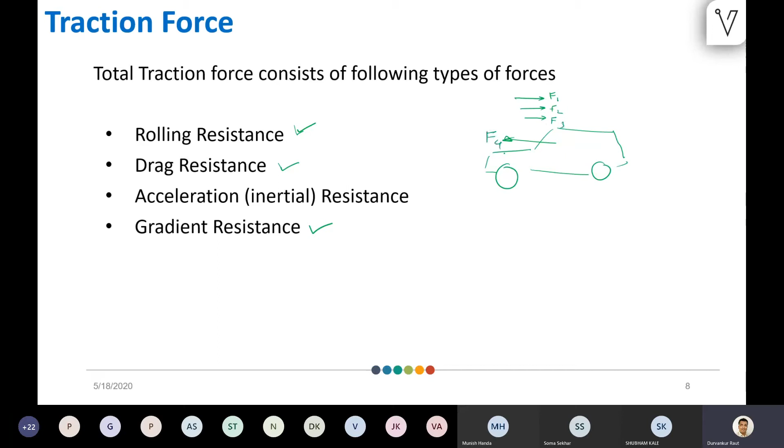So there are three different resistances: rolling resistance because of the rolling friction, drag resistance, and gradient resistance. So I have a vehicle, and this vehicle is being driven towards left. There are three different resistances which are against the motion. Let's say I have values of these resistances as F1, F2, and F3. And if the force applied by the wheels is F4, if this F4 is more than F1, F2, and F3 together, then only the vehicle will move.

If this force is less than all these forces together, then the vehicle cannot move, right? Even if it is equal, the vehicle cannot move, because all of the force applied by the wheel is getting cancelled out against rolling resistance, drag resistance, or gradient resistance. It cannot change its state of rest or state of motion, right?

If it is already in motion, then if F4 is less than F1, F2, F3 together, velocity will reduce. If F4 is equal to F1 plus F2 plus F3, then velocity will remain constant, because there is no extra force available to push this vehicle. This extra force which is available to push this vehicle is called acceleration resistance, because that also needs to be overcome from an inertial perspective. In the inertial frame of reference this can also be called a resistance, or you can call it acceleration force.

So this acceleration force, which is supplied by the wheel, let's call it Fa, because Fa is different from F4 in this case. F4 will be the total force which is supplied by the wheel, or shall I call it by some other name? Let's call it total traction, FT.

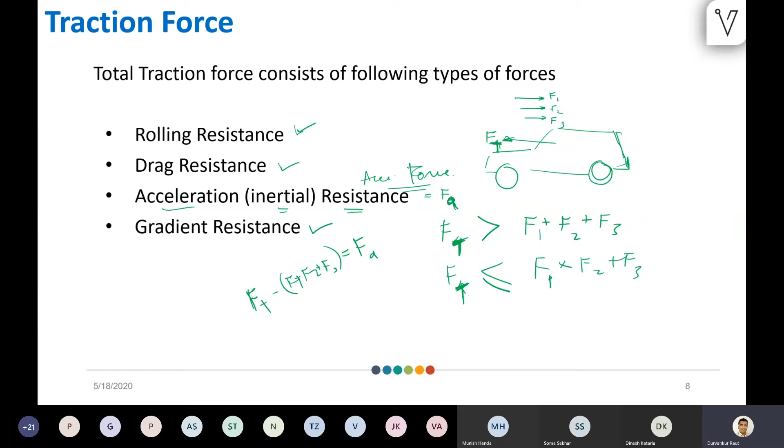So if the total traction force supplied by the wheel is more than F1, F2, F3 put together, then the remaining part, which is FT minus F1, F2, F3 put together, will be used for accelerating the vehicle. If this is not overcome, the vehicle will decelerate, it will reduce velocity. Okay, I hope you have understood. If not, we can discuss this again at the end of the session. So let's move ahead.

Let's talk about the first resistance, rolling resistance, composed primarily of tire deformation, tire penetration, surface compression, tire slippage, and air circulation around the wheel, and many other factors known and unknown till now. All those put together are expressed by one simple term called the rolling coefficient of friction, mu r. If it is known, then the rolling resistance force is calculated as mu r mg. If the vehicle is rolling towards right, the rolling resistance will be towards left, opposing the direction of movement.

Resistance from tire deformation means that while the vehicle's tire is on the road, the tire itself gets deformed when it is resting on the road. Although it is shown as a circular shape, you might see some flat portion in the tire, right? This flat portion is here when the tire position angle is, let's say, 0 degrees. As soon as it becomes 90 degrees, the vehicle moves ahead and now this portion comes into contact with the road.

And rolling resistance, as we talked about, is basically calculated from a simple formula, which is mu r mg. In this case, mu r becomes the rolling coefficient of friction. This mu r is dependent on the road material and the tire material. So for a steel wheel and steel rail, like in locomotives and railways, the rolling resistance is very less, 0.001 to 0.0025. For bicycle tires again it is less if the bicycle tire is well inflated.

If the tire is not inflated properly, or if the person sitting on the bicycle is pretty heavy, then there will be good enough tire deformation and this number will vary. But in total you can maybe assume it to be 0.0015 to 0.0025, again based on the road surface condition. Truck tire on asphalt 0.006 to 0.01. Ordinary car tires on concrete 0.01 to 0.015. Car tires on tar road or asphalt road 0.03, and for car tire on loose sand 0.2 to 0.4. So different road conditions and tire materials have different rolling resistance coefficients.

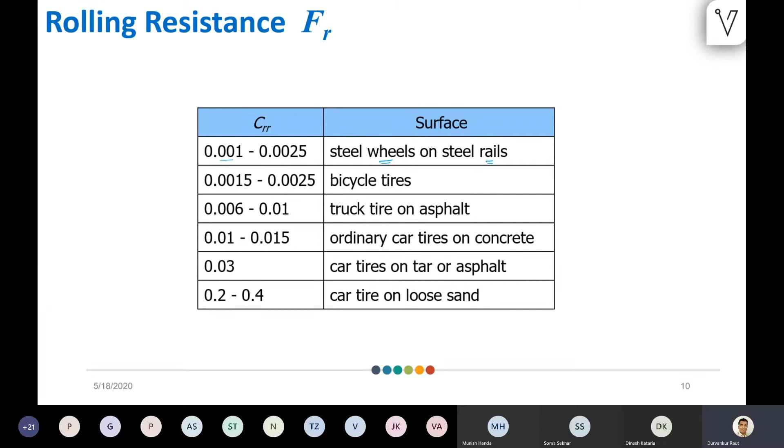For OEMs, these numbers are generally available from the tire manufacturers. So people who are coming from OEMs for this training will be getting the relevant numbers for your tires from your tire manufacturer. Now let's look at the formula again, mu r mg. This is dependent on the rolling coefficient of friction and the gross vehicle weight m. M in this case is GVW, gross vehicle weight. G is the gravitational acceleration. So mu r mg is the total rolling resistance.

To reduce this rolling resistance, you need to reduce the rolling coefficient of friction or reduce the complete mass. Only two things are there. G cannot be changed; G is the same while you are living on Earth. So either you can change mu r by changing the tire material, or by changing the pressure the tire is inflated by. If the pressure is high, then the area which is getting deformed at the tire and road interface is smaller. In that case, the coefficient of friction is less.

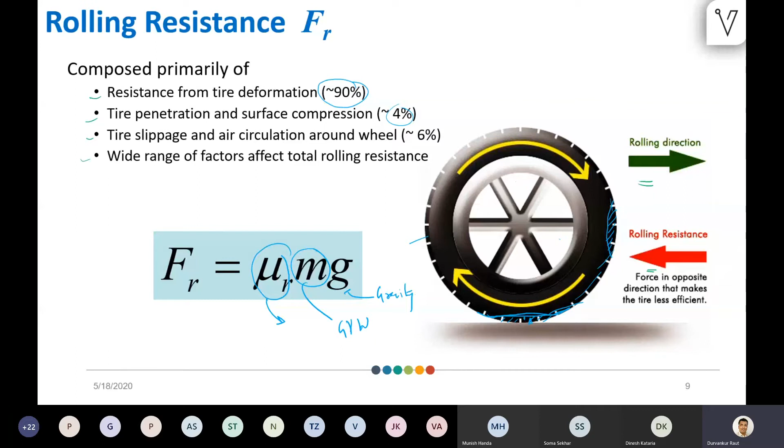The second resistance is air drag, aerodynamic resistance. It is present because of the turbulent airflow around the vehicle body and friction of air over the vehicle body, plus vehicle component resistances from radiators, air vents and so on. So if there are mirrors projecting out from the vehicle, that also changes the drag resistance. If somebody is taking the hand out while driving, that will also increase the aerodynamic resistance.

The aerodynamic resistance is calculated by this formula, rho by 2 CD AF V square. In this case, rho is the density of air, CD is the drag coefficient, AF is the projected frontal area, and V is the relative velocity of the vehicle with respect to the air around it.

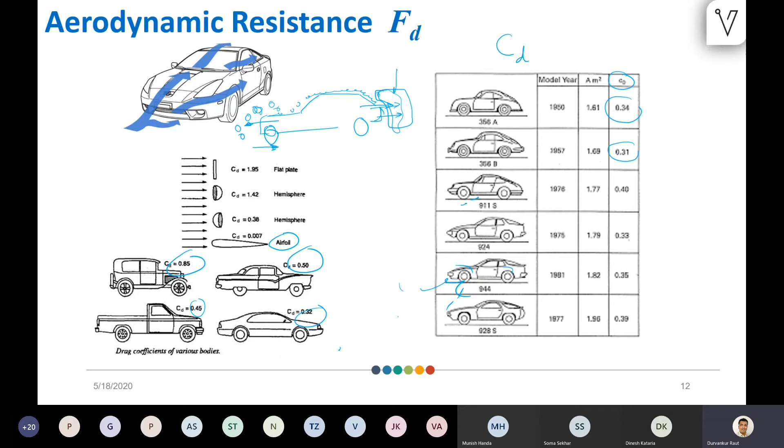In the case of EVs, the rolling resistance and drag resistance play a very important role in deciding the range of the vehicle. They also decide the range of ICE engine vehicles, but in ICE engine vehicles the fuel tank capacity is so huge that the complete range of the vehicle, how you are driving and what is the tire pressure, you don't monitor so much because that doesn't matter much. Whenever the fuel tank gets empty, we just have a habit of seeing the fuel meter and refueling at the pump, and that's it.

So we never used to bother about what the tire pressure is and what my vehicle's CD value is and so on. But from here on, as you are seeing all these new age electric vehicles, the popular ones among them like Tesla have CD values close to 0.23, 0.29 for different vehicle models. There was one vehicle, General Motors' EV1. This GM EV1 had a CD value of 0.19, which is kind of a milestone for all the vehicles today.

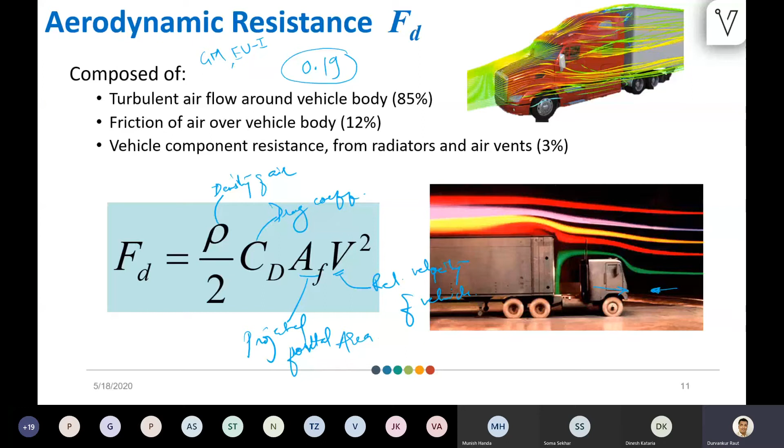The vehicle is named GM EV1. You can search about that vehicle on the net and find more information about it. Although this was technologically very forward and kind of a milestone vehicle design, it was not commercially successful because of various reasons. And there is a very good documentary available on YouTube about this. You can take a look at that.

About the third resistance, which is gradient resistance. This gradient resistance is coming because when you are going uphill, like in this case, the ground pulls you back. So when you go towards right uphill, the ground pulls you back. And while the ground pulls you back because of the gravitational acceleration, the force Fg in the same plane, like this theta plane here, can be expressed as mg sin theta. So this mg sin theta becomes the force of pull by earth when you are going uphill.

When you are going downhill, then the same force will assist the motion and can be expressed as minus mg sin theta. So once all these three resistances are overcome, then whatever is the remaining force coming from the wheel will be responsible for acceleration of the vehicle.

So for the acceleration of the vehicle, the force can be expressed as mass into acceleration. Earlier we saw the total tractive effort was Ft, and if Ft is more than the rolling resistance plus drag resistance plus gradient resistance, all put together, then Ft minus all these three forces will be equal to Fa, and this remaining Fa will give rise to the acceleration of the vehicle.

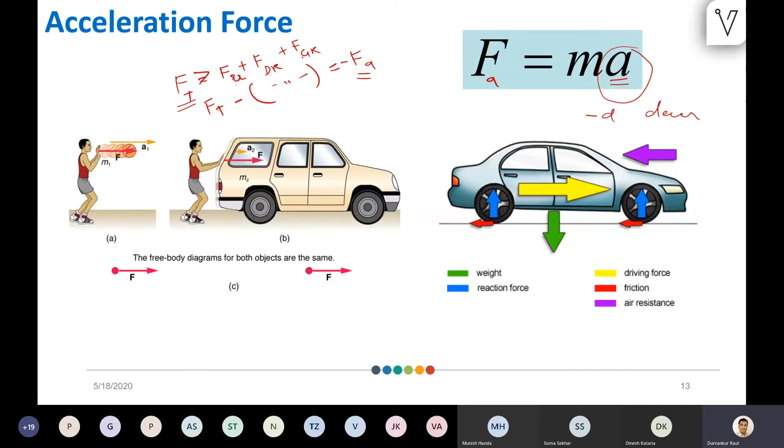So if this Fa is negative, then acceleration will be negative. Negative acceleration means deceleration, so vehicle speed will come down, if you are not giving more force than rolling plus drag plus gradient together. Okay. So that was about total traction force. Let's take a look at all these formulae once again.

So when the vehicle is going uphill, all these forces are against the vehicle speed. Vehicle is speeding towards right. Aerodynamic force will be towards left. Here, the inertia of the vehicle will be again towards left. Internal friction will be towards left, and gravitational pull will be again towards left because you are going uphill. And tire rolling resistance will also be towards left. So all these forces or resistances are opposing the motion of the vehicle.

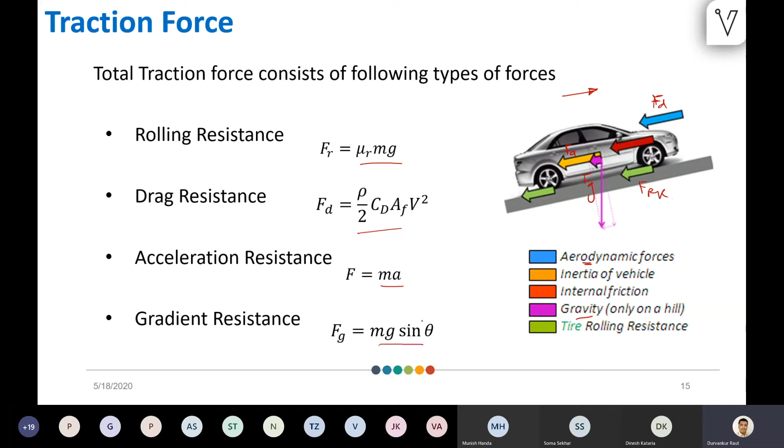Rolling resistance is expressed as mu_r mg, drag resistance as rho by 2 Cd A v squared, acceleration resistance as ma, and gradient resistance as mg sin theta. So with this, I guess now you are ready to solve the first example. Let me read this out for you.

A two-wheeler scooter OEM has decided to launch two versions of a particular model, a long range version and a performance version. Find peak power required for 0 to 40 kmph time of 6.5 seconds for the long range variant and 4 seconds for the performance variant on a flat surface. So there is no gradient here.

Peak wheel torque and peak motor torque are also to be calculated at 5% gradient. So the vehicle is to be driven on a 5% gradient without acceleration. You just need to move and do not need to accelerate. What is the peak wheel torque required and peak motor torque required? And the following information is given.

Frontal area is 0.7 square meters. Gross vehicle weight is 175 kgs. Drag coefficient is 0.6, very good drag coefficient. Rolling coefficient of friction is 0.014. Density of air 1.2 kilogram per meter cube. Battery pack size 48 volt by 90 Ah for performance version and 72 volt by 60 Ah for long range version. So here we have changed voltage and current ratings for our calculation purpose.

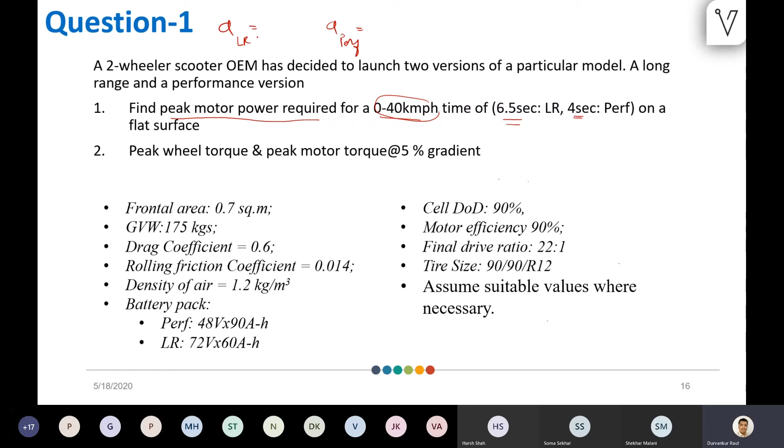What you need to do is just 40 minus 0 into 5/18 to convert kmph into meter per second. In how many seconds? 6.5 seconds for the first one and 4 seconds for the next one. So divide it by 6.5 and you'll have the long range acceleration. Have you got this number? Forty into 5/18 divided by 6.5. So this would be 1.7 meter per second square, and the next one will be 2.77 meter per second square.

Now, the force required to deliver this acceleration would be F equal to mass into acceleration, F = ma. Mass is given, which is not changing whether it is the performance variant or the long range variant. So we need to assume the same mass. Although this might not be the case in an actual vehicle, as the battery pack weight will vary. But for now, to reduce calculations, we are assuming the GVW to be the same, 175.

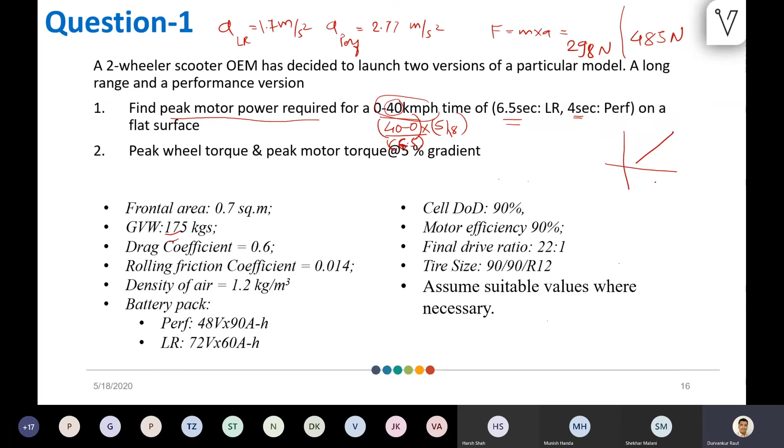Now, to know the peak motor power required, we need to assume that the velocity of the vehicle is almost 40. So it is going from 0 to 40. So if I plot velocity versus time, if I'm going from 0 to 40 linearly, then the maximum power requirement will be exactly at 40 or just a little bit less than 40, like 39.999999.

So that will be the peak power requirement, and to get that peak power requirement you need to multiply force by velocity. So force into velocity will give me power, and velocity in this case at 40 kmph we have already calculated to be 11.11 meter per second, right? So 11.11 into this force will give me the power required for the different variants of this vehicle. So 298 into 11.11 is giving me how much?

Almost 3.3 kilowatt. Can I ask a doubt? And for the performance version it is going to be 485 into 11.11, that is 5.3 or 5.4 kilowatt. Sir, maybe the calculations are a bit off, but I'm getting 3.8 kilowatt, and at 90% efficiency 4.2 kilowatt. Okay, so you have also... I'm yet to consider the motor efficiency. Even at the base level, it's 3.7 kilowatt.

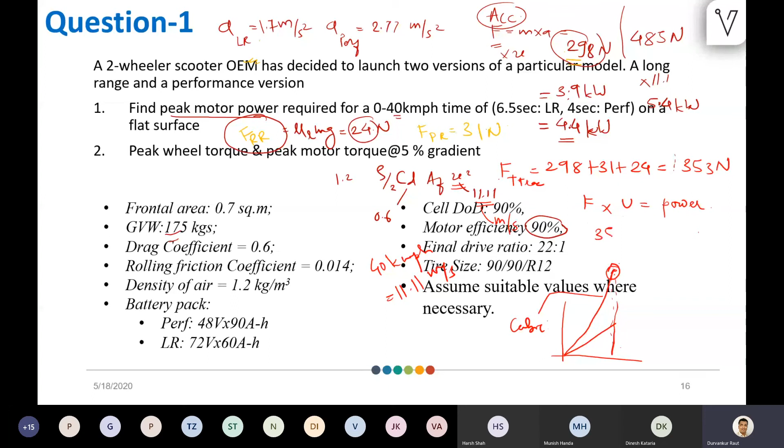So 40 kmph is equal to 11.11 meter per second. So let's multiply this force 353 by 11.11, which will give me 3.9 kilowatt as the output. Are you getting this number, 3.9 kilowatt?

Once you get the motor output 3.9, motor efficiency is 90%. So input has to be more than this 3.9. So let's divide this 3.9 by 0.9 efficiency, and we'll get 4.4 as the input power required for this motor in kilowatt. Okay.

Yeah, this is okay. Just one thing, I forgot the acceleration formula. This is, I think, change in velocity. Acceleration 1.7, how have you got it?

Okay. So for that, what we did is 0 to 40 kmph in 6.5 seconds. We converted 40 into meter per second, which will be 11.11. So 0 to 11.11 meter per second in 6.5 seconds. Divide this by 6.5 and you'll get acceleration, rate of change of velocity per unit time. Yeah, great. Now got it. Thank you.

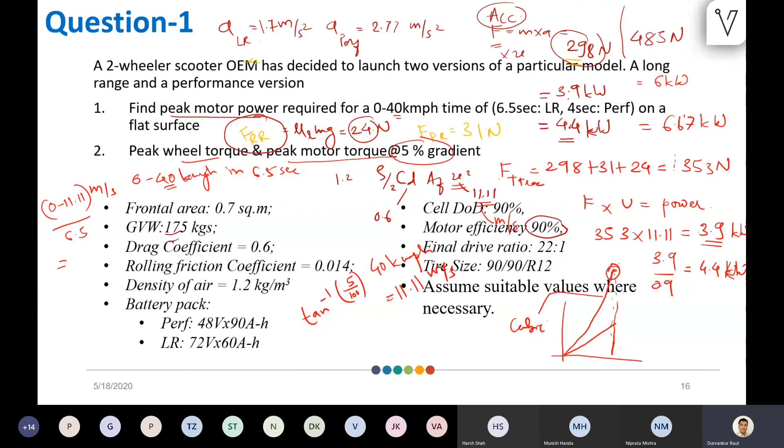So I guess we have now crossed the end time allocated to me, 8 o'clock. So this particular calculation you can take as a home assignment. I'll move over to the next questions, and we can discuss in a few minutes how those can be solved. If you need any help in solving these questions, we can take it up some other time in the coming week.

Question number 2: utilizing data from question 1, calculate total energy utilized for acceleration from 0 to 20 followed by 20 to 0 kmph at 15% regeneration efficiency. So here you need to first go from 0 to 20 in the same time for the long range variant, 6.5 seconds, and back from 20 to 0 in the same 6.5 seconds. But during regeneration, assume efficiency of regeneration as 15% only.

During acceleration, you assume efficiency of the motor to be 90%, and during regeneration you assume the regeneration efficiency of the motor to be 15%. That's the only change. So you can try to solve this, and if there is any difficulty, we can talk about it. You just need to calculate the total energy utilized while doing so. Question 3 is calculating...

Question number 2. Because the motor will act as a generator, generally the efficiency in the generation period is generally 15%. What happens is at lesser RPMs, at lesser speeds, the efficiency is less because the regeneration does not happen, because it has a fixed gear ratio. If the RPM is less, regeneration is very difficult because the voltage drops down. The voltage of regeneration comes down, so regeneration does not happen, and that's why we have assumed it to be 15% only. So in two-wheelers and four-wheelers, what is the regeneration efficiency generally?

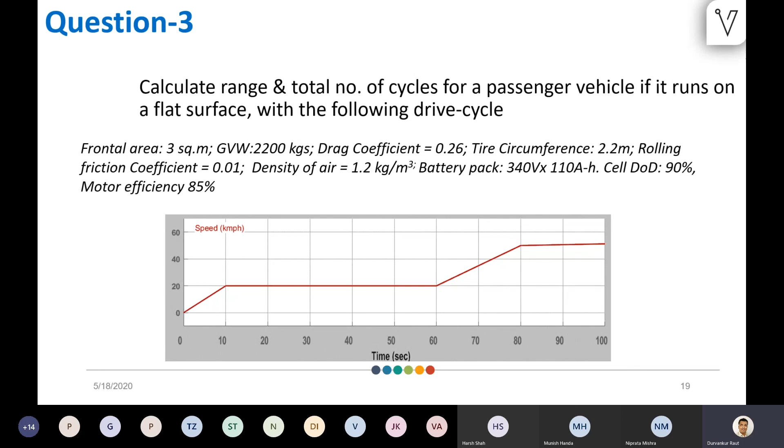Question 4 is when all these factors are there, and there is an extra electric load of 300 watts for only 2 hours while the vehicle is driving at night time, and this extra load is considered only once during every charge and discharge cycle. So what you need to do is reduce this from the overall capacity of the battery pack. In question number 3, it was a 340 volts battery pack of 110 Ah. The energy utilized in overcoming this driving cycle will get reduced by 300 into 2 hours, that is 600 watt hours of energy deducted from the battery pack size. Then run the same calculations again, and you will get the answer for question number 4.